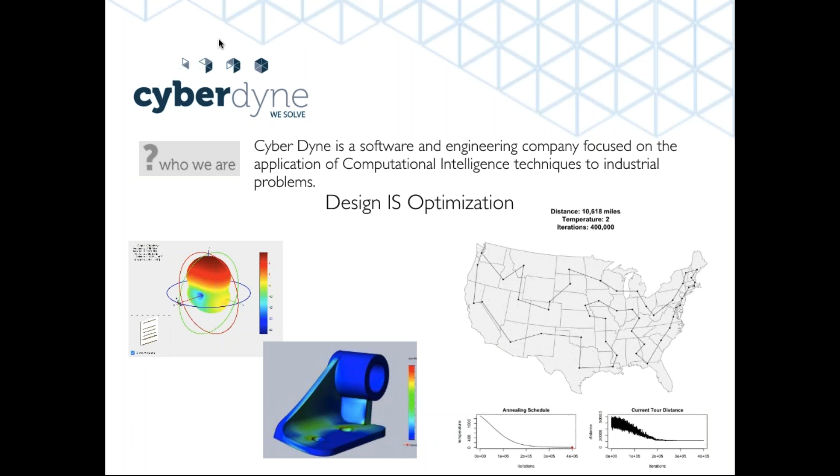For example, let's say we want to design an antenna, optimizing the electromagnetic field of this antenna by changing the shape and size of each component. The same optimization technique can be applied to solve this engineering problem in order to maximize the electromagnetic field in a specific direction, accomplishing your design task. These techniques can be used in several different aspects of engineering, such as mechanical engineering, electromagnetic engineering, and so on. In order to solve this kind of problem, we actually realized Kimeme, this new platform for optimization, which is composed of 3 main features and characteristics.

First of all, we will see what process integration is for us and how it works. By means of process integration, we'll see that it is possible to describe your own design task easily and solve it straightforwardly for your optimization.

Then we will talk about process automation, which is a component built into Kimeme that lets you spread the calculation of your process across several computers in order to speed up your optimization process.

So first of all, process integration. By means of Kimeme, it is very easy to build graphically a workflow that can describe your day-by-day design activity on your specific project.

As an example, we can see the task here of designing, changing the shape, the body shape of a car by means of, let's say, 4 numerical parameters. This is just for the sake of an example.

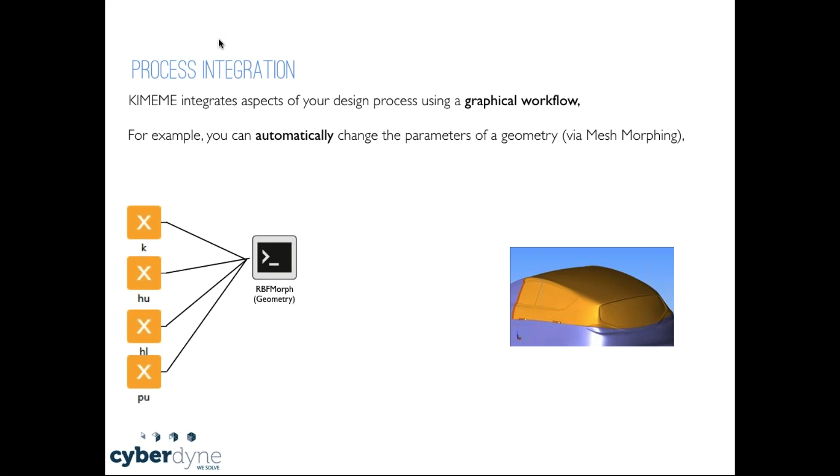Of course, the problem can be much harder than this, and we'll see a more complete problem in a meanwhile. So let's say we want to use these 4 numerical parameters to change the shape of this car, using a software, let's say a mesh morpher or a CAD.

Then the results of this shape, the output of the first software, can be sent to a second software, let's say OpenFOAM, to accomplish a CFD simulation to see if our car is aerodynamic or not.

And let's say that we are going to make some cost estimation by means of an Excel workbook that can let us say if the specific design at each simulation is, for example, expensive or not. And let's say that this cost estimation is a function of some of our parameters.

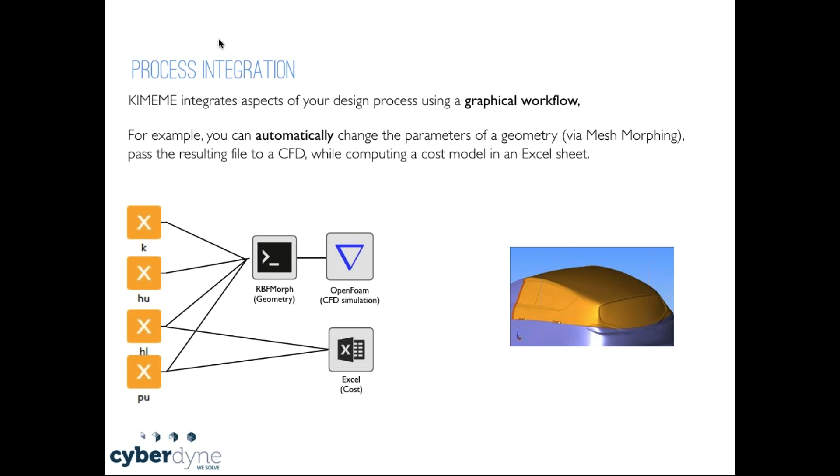So we want to obtain the best car possible, the most aerodynamic car possible. So we want to maximize the performance of the CFD simulation and at the same time minimize the cost estimated by Excel. This is actually called multidisciplinary, multi-objective optimization.

This is something that every engineer every day is actually solving by hand, interacting by hand with all the tools used every day in all the activities related to the design process.

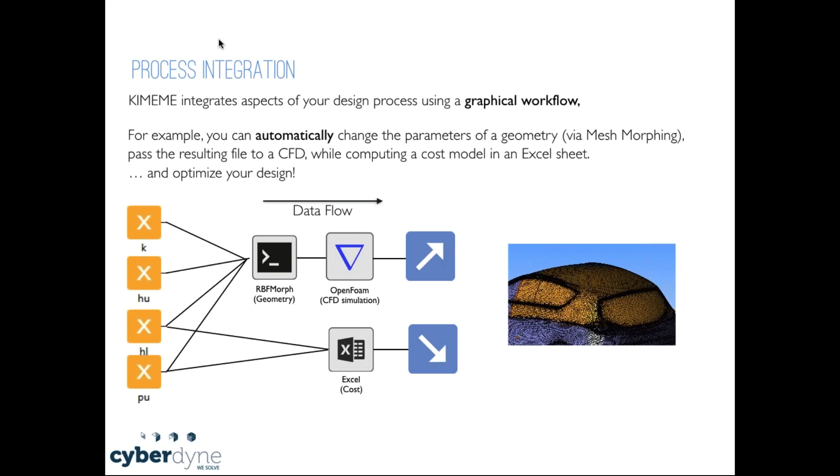And by means of process integration, it is very easy to describe all the process using this data flow paradigm, which is used to describe all the sequences involved in the activities for the specific project.

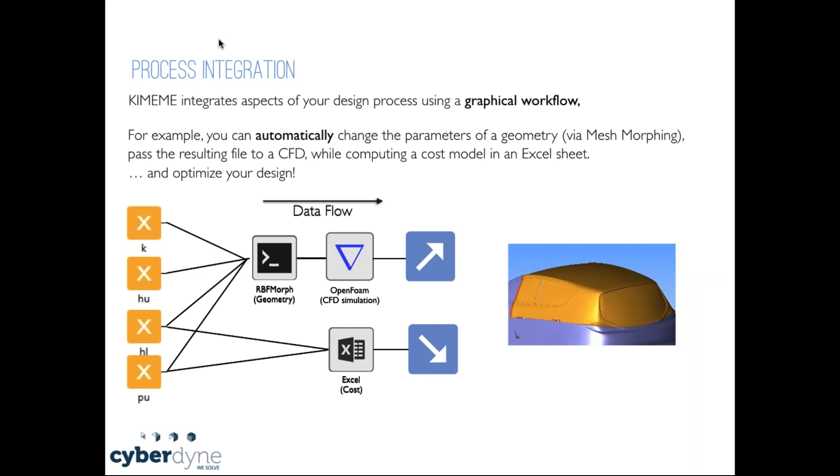And by means of this very easy representation of your project, the data flow representation, it is very easy to save a lot of time, saving all the time you spend day by day interacting with the user interface of your product.

Namely, in order to solve the design problem we have just seen now, you should actually interact with the first software, let's say the CAD, using the interface, changing the parameters on this software, saving the files or exporting the file in a specific format, and then move this file to another process, OpenFOAM in this case, or even send this file to a colleague of yours that has to run the simulation for the aerodynamic part of the project.

And at the same time, you want to change the parameters into Excel, and so on. So all this single specific interaction with the software is time consuming, and by means of process integration and Kimeme, you can save a lot of time automating all these processes and all the process related to exchange of information and files from one process to the other.

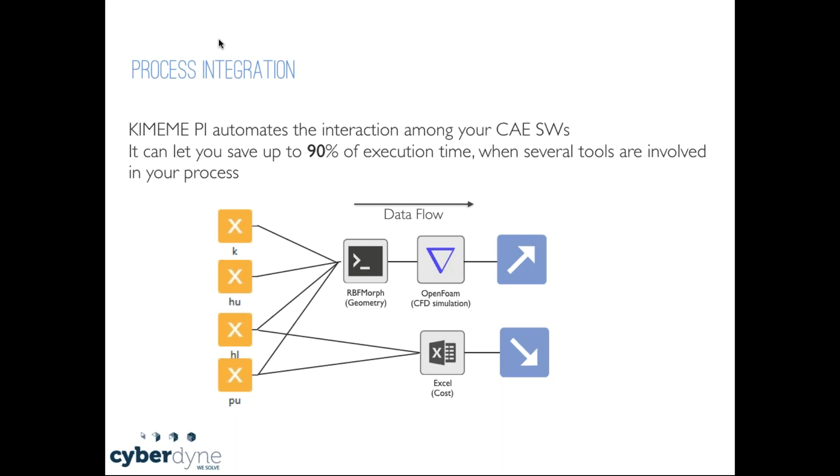In order to actually describe your own specific design activity, we integrated into Kimeme a palette of several different processes that can be used in the description of your project.

For example, you can put Java code or Python code or command line interface programs such as old-fashioned style FEM analysis tools that can be used with input-output described into files, but also you can integrate higher level software programs such as MATLAB for mathematical simulation with Simulink, or Siemens AMESIM for discrete simulation.

Excel of course, and then you can get your own software in the field of finite element analysis tools or CFD tools, for example STAR-CCM+ or ANSYS.

And finally, if you have one, you can describe your changing geometry for optimization using some among the best CAD, parametric CAD on the market. Of course, we have a strong support for Siemens NX.

And several other processes can be described by means of the interaction of Kimeme with third-party software. This palette is growing every day because we are capable of building a new node for this palette for your specific processes. So if you have a software that Kimeme is not already supporting, then we can write the software and build this new support very quickly in order to describe your own project into Kimeme.

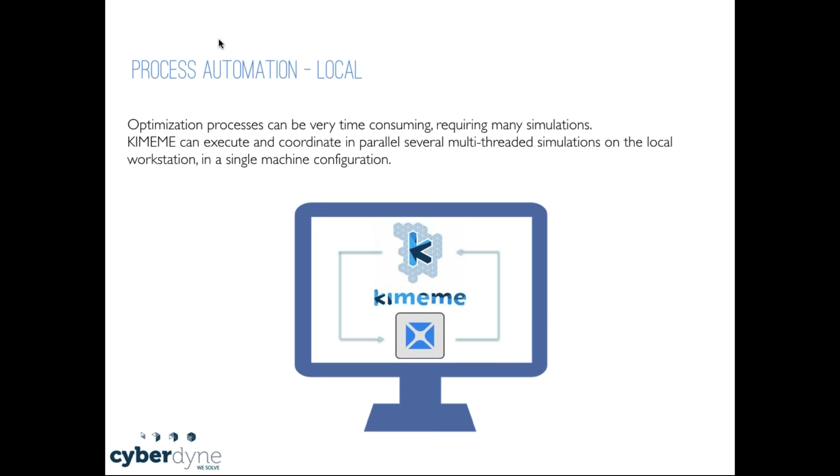But if you have, for example, other workstations in your office, with some software installed and other workstations with other softwares available, by means of Kimeme Network, which is a component natively built into Kimeme, you can actually spread your calculation over the local area network, and leverage on your hardware assets in order to speed up your calculation.

And if you have more computers, you can actually use all those computers with all the softwares. And of course, if you have an HPC cluster in your company, then you can actually connect your HPC cluster to these calculation networks as well in order to speed up even more your calculation.

And if you have an account on Amazon Web Services, you can plug your account into Kimeme Network in order to spread your calculation over the cloud, spawning several different virtual machines on Amazon Web Services to run just your simulations, and then switching down your virtual machines to just use the computational power you need. We already support several softwares of the Kimeme palette on Amazon Web Services, and this palette is growing as well.

And again, everything is automatic here. So you don't have to set up shared folders or write code to move files between computers, because everything is automatic. Kimeme is in charge of moving all the files needed for your simulation automatically, moving just the most updated, up-to-date files. So if you have big files that need to be moved from one computer to another but have already been copied, Kimeme is smart enough to move just the most up-to-date files.

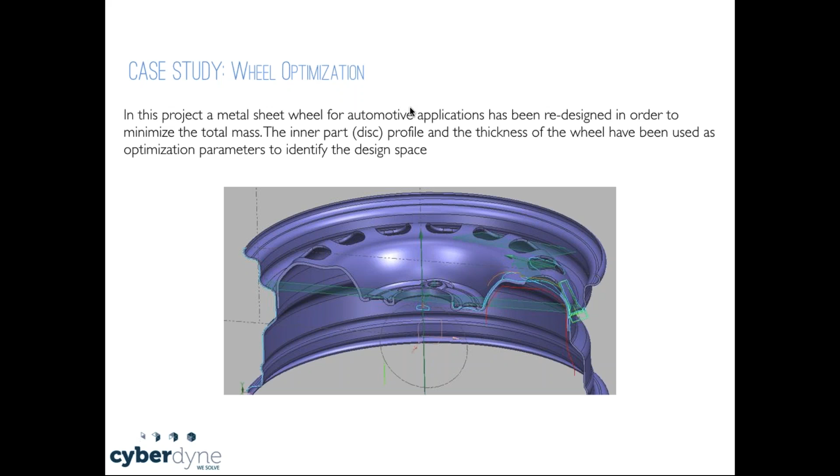So actually we want to change the shape of the wheel in order to find the most suitable combination of these parameters. In this specific task, we actually imported an NX project in Kimeme by means of the node I showed you before, and we have in this project 14 parameters.

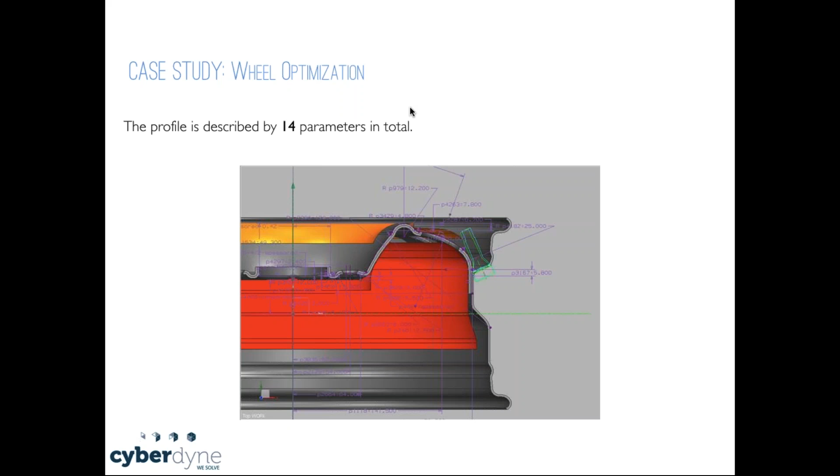So 14 geometrical parameters are defined in Siemens NX that will be changed through the interaction of Kimeme with NX and other software, in order to find the best combination and shape, to save weight for the wheel while also obtaining a strong wheel.

Just to give you an example of the effect of changing these geometrical parameters on the wheel, you can have a look at these animations. We see the effect of 4 of these geometrical parameters. For example, P979 is the width of the nose on the side of the wheel. As you change this parameter, the shape changes, as well as the effect of the load on the wheel, shown here through finite element analysis screenshots.

All these screenshots have been taken by means of Kimeme, automating the process of changing the shape and submitting this new shape to a FEM analysis process by means of the experiment task.

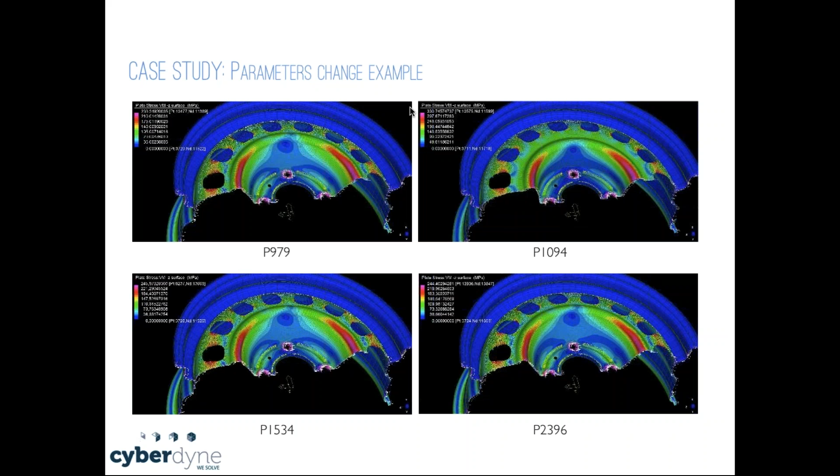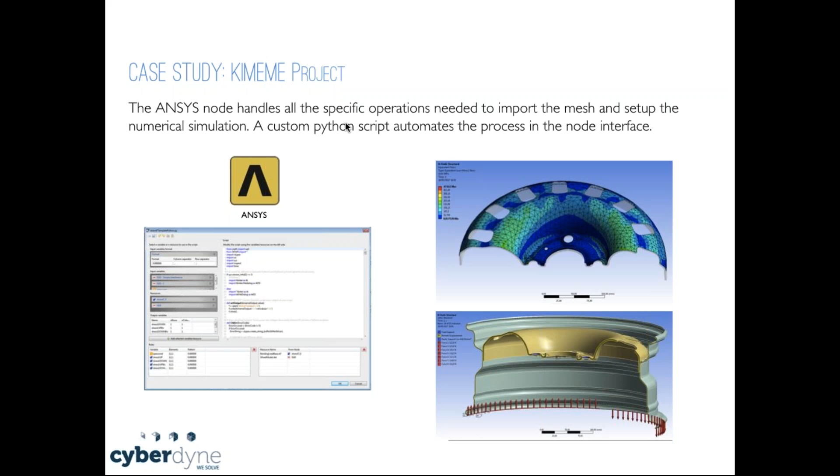This is something you can accomplish with Kimeme, but in this case our task is to optimize the wheel. So through the integration of NX for changing the geometry and ANSYS for assessing the performance of each specific design candidate, we have implemented our design task into Kimeme. Now let's switch to Kimeme.

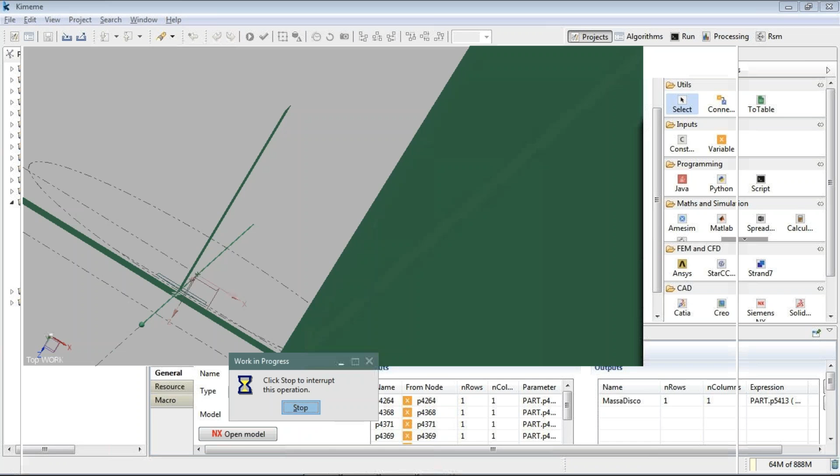Then I can open Siemens NX directly from Kimeme in order to see and interact with my project file directly in NX. Here we see a view of our wheel, and we can interact with NX as usual. This is a full view of our wheel now.

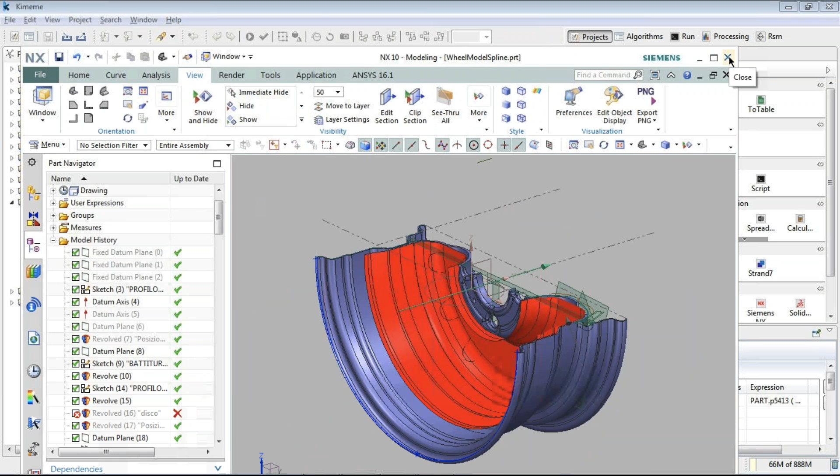After interacting with the CAD, we can close it, go back to Kimeme, and then make the couplings between each parameter of Kimeme and each parameter of the geometrical shape in NX.

Kimeme is very smart from this point of view, because it's capable of using NX to inquire and analyze the PRT file, and to see the full list of parameters defined in the CAD file. So we can see all the parameters here, and choose which parameter needs to be changed by Kimeme, injecting its numerical parameter into the CAD.

After this process, the CAD is changed and automatically saved. You can see here this type field is reporting Kimeme network. We can change this option here, but we'll leave it on Kimeme network.

We can change this option to define whether we want to run this NX process on this very computer, our local workstation, or over the network using the Kimeme network, sending files and execution commands to another computer to change the geometry and make a new shape.

This connection from NX to the ANSYS icon here is used to actually move the file from the computer in charge for executing NX to another computer here in charge for executing ANSYS.

Here again, we have a project of ANSYS. We can open the project, but we can save time here, and by means of a macro, make some automatic operations on the imported project file into ANSYS. And we can again make some computations on the output of ANSYS here.

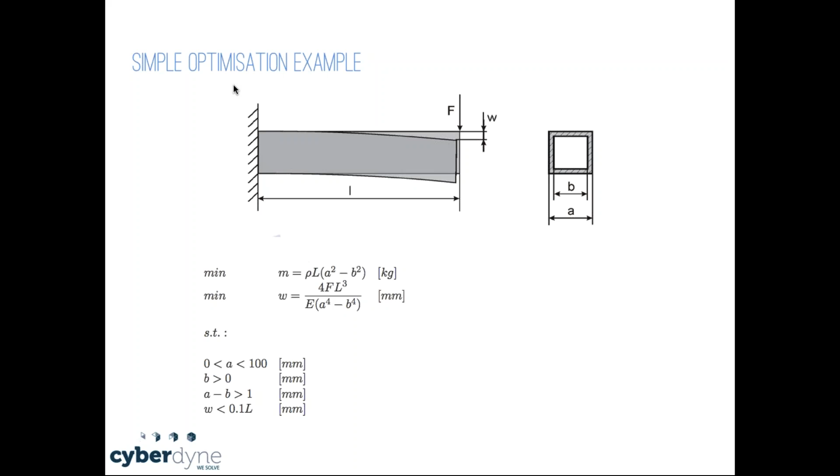And let's say in this case we want to use just plain formulas, so we want to find the combination of A and B that minimizes these two numbers. In this case we are using formulas just for the sake of the demo, in order to accomplish the task very quickly.

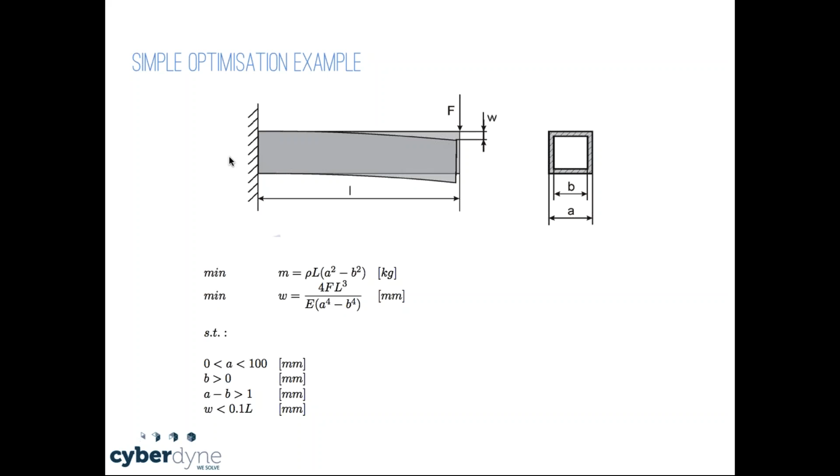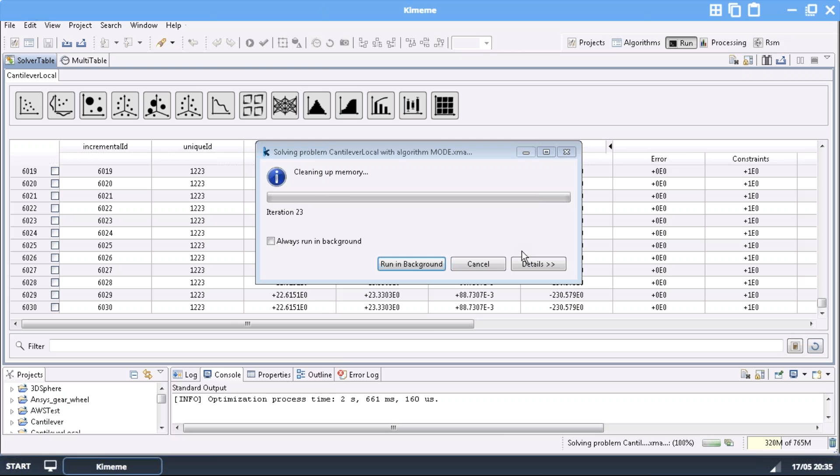Yes? No, we have a question. Yes, of course, okay, sorry to interrupt you. Someone wanted to know...

How can I share project files and data with my team or my colleagues?

Oh okay, so actually, as you can see here on the cloud, you have your workspace of Kimeme here with all your projects and files, and you can share this project folder both on your local computer, because here you have a folder called Kimeme Workspace, which is the same folder that Kimeme is using here, or on another account of Kimeme you can link the same folder, sharing the project among several users. So you can move files from your local computer to your account online and back, and share files among several accounts. And this is very easy.

So by means of this approach, you can implement a sort of co-working, co-design approach to your optimization. For example, you can optimize one aspect of your project and then save the results into this cloud space, and a colleague of yours, using his own account, can connect, import the results from the optimization, and use those results in his own optimization tasks.

Okay, and this is very straightforward. Great, thank you. Okay, so just to complete my demo very quickly, here these are the results of our optimization. This is the table containing all the candidates for our optimization.